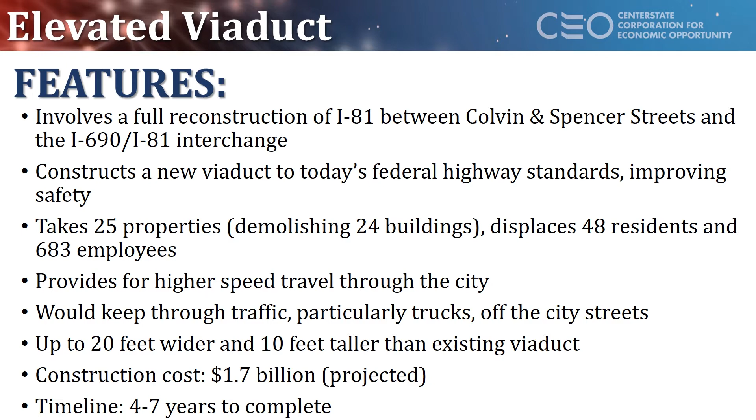It would provide for higher speed travel through the city and would keep through traffic, particularly trucks, off city streets. It would be 10 to 20 feet wider and 10 feet higher than the existing viaduct. The projected cost is $1.7 billion to construct, and it would take approximately 4 to 7 years to complete.

The new elevated viaduct's advantages are that it is a proven system for moving vehicles through downtown Syracuse, and it keeps through traffic off the city streets. The disadvantages of the new viaduct are the acquisition of properties and demolition of buildings, forcing the relocation of homes and businesses, and the value of that property being lost from the tax rolls.

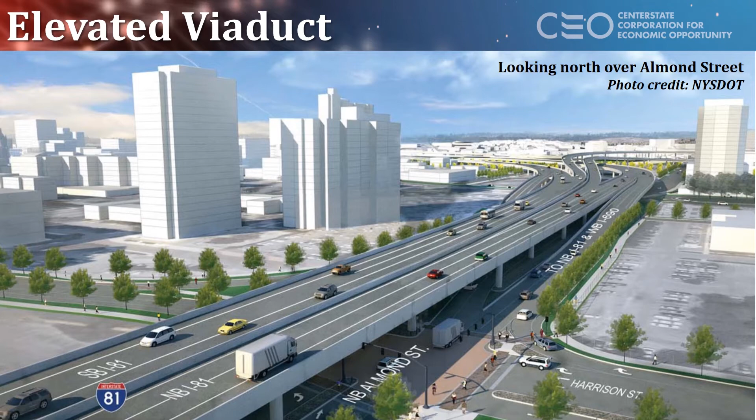Option 2: The community grid. The community grid seeks to make use of the city's numerous north-south streets that run through downtown. These streets often have traffic levels that are well below their capacity. The goal of the community grid is to disperse the traffic across the street network.

Most of the traffic that is using the current viaduct starts or ends in downtown, University Hill, the lakefront, or other neighborhoods in the city center. Under the community grid, daily commutes do not change very much from today. And the community grid has the advantage in that if there is a disruption, a driver can easily switch from one street to another to avoid it.

The community grid brings automobile traffic through downtown and more visitors into the central city, supporting downtown commerce. Land now used by the viaduct can be repurposed for other uses.

Features of the community grid: it disperses traffic along the city street grid. Almond Street becomes 2 lanes in each direction with turning bays. It includes a new interchange for I-690 at Crouse and Irving Avenues. I-481 becomes the new I-81.

It de-designates the section of I-81 between I-481 to the south and I-690, maintaining a state highway to approximately Martin Luther King Jr. Drive. It maintains the section of I-81 north of I-690 as a high-speed interstate with a new designation. It requires the acquisition and demolition of 5 buildings, displacing approximately 83 employees and no residents. It is projected to cost $1.3 billion to construct and take approximately 4 to 7 years to complete.

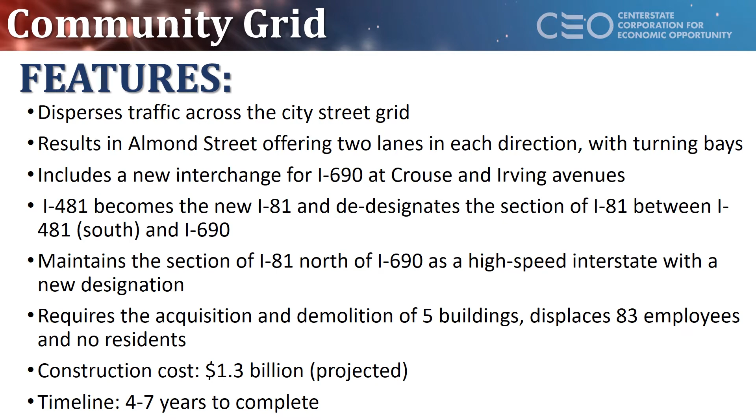A challenge of the community grid is that should some through traffic not divert to what is today 481, there may be more traffic on city streets, which would result in additional wear and tear on these roads.

Under the community grid, the current I-481 becomes the new I-81, and a third lane is added at some key points. North of the southern I-481 interchange, today's I-81 would function like it currently does, but becomes a state highway until it transitions to city street speeds around Martin Luther King Jr. Drive, where it would become Almond Street.

The section of I-81 north of downtown, from where it intersects with I-690, to the northern I-481 interchange, remains a federal highway spur with highway speeds and multiple lanes, but with a new designation.

Through traffic goes around the city on what is today I-481, and drivers who want to come into the city use the old I-81. It is important to remember that according to NYSDOT, most of the traffic using the viaduct today has destinations in downtown, University Hill, and the lakefront, so in reality, not a lot of through traffic exists on the viaduct, so there may only be a limited impact on I-481.

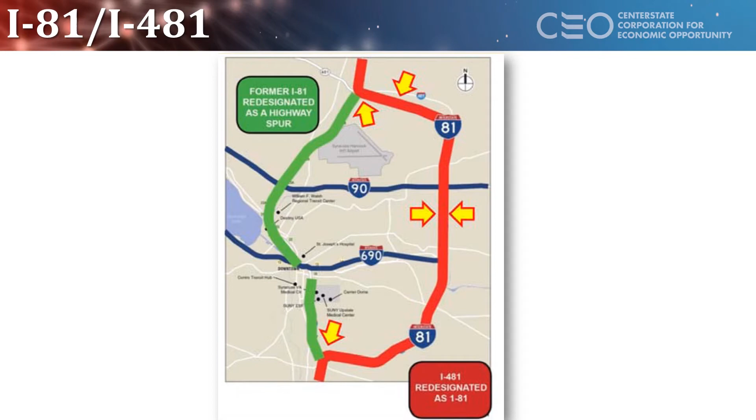A disadvantage of the community grid is that travelers going from the south to the west, or vice versa, wishing to stay on a highway, will be redirected further east. This will add some extra miles and time to their journey, a particular concern for trucks.

Option 3: a tunnel. Added back into the list of alternatives in January 2018, the tunnel does not have as much detail available about it as compared to the new viaduct and community grid. What can be shared was learned from the tunnel options NYSDOT studied earlier in the project, the tunnel feasibility study completed by WSP in 2017, as well as other recently completed and ongoing tunnel projects across the country.

In Syracuse, the tunnel option envisions a 4-lane tunnel built under the path of the current I-81 viaduct or closely adjacent to it. The tunnel would provide a place for through traffic to move quickly through the city, while those destined for the center city would use elements of the community grid built above the tunnel. The advantage of the tunnel is that it allows through traffic to travel through the city without congesting city streets.

The tunnel is the most expensive option, with construction estimates between $3.5 and $4.5 billion, and it also imposes operating and maintenance costs the other solutions do not. These costs result from the need to run lights in the tunnel 24 hours a day, to exhaust auto emissions and pump in fresh air 24 hours a day, and to continuously pump saline groundwater away from the tunnel structure, which otherwise can cause corrosion.

Features of a tunnel: it provides for higher speed travel through the city. It may or may not be an interstate. Through traffic would not have the option to exit for downtown and University Hill. It would keep through traffic, particularly trucks, off of city streets. Unknown underground conditions could increase construction time. The impacts on commute time, tax base, property acquisitions, and displacement of residents and employees are currently unknown.

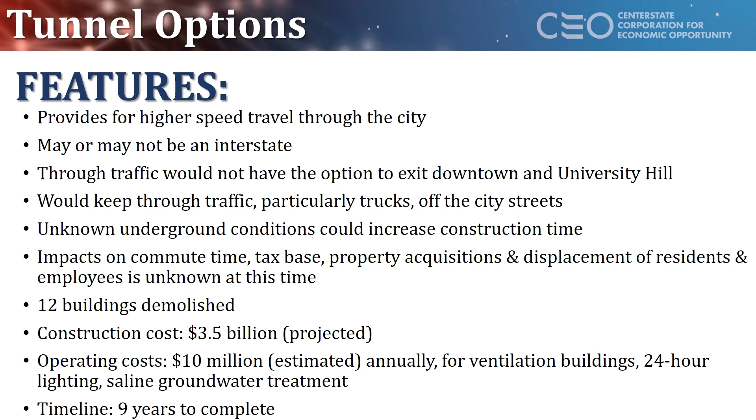12 buildings would be demolished. It's projected to cost $3.5 billion or more to construct. It would have higher annual operating and maintenance costs. Some projections show this to be as high as $10 million annually for ventilation, 24-hour lighting, and saline groundwater treatment, and it's projected to take 9 years to complete.

The tunnel would allow high-speed through traffic a path through the city, but would not serve the needs of travelers starting or ending in downtown or University Hill. In fact, when the tunnel is going between downtown and University Hill, it is 80 feet below ground as conceptualized by NYSDOT and WSP. There is no Harrison-Adams interchange, and there is no way to get to center city destinations from the tunnel. These travelers would need to use city streets.

One advantage of the tunnel and the new viaduct option is that they keep through traffic off of city streets. NYSDOT estimates that 15% of the 72,000 vehicles per day that use the existing viaduct are trucks. That's 10,800 trucks a day. However, trucks carrying hazardous materials would not be permitted to use the tunnel.

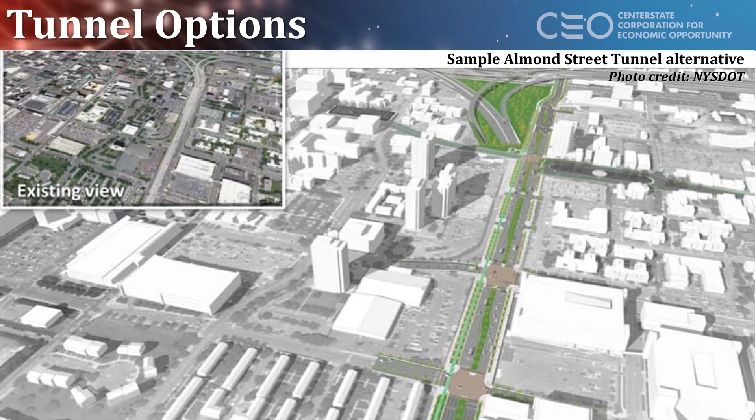The proposed orange alternative was identified in the WSP tunnel study as the most feasible. It would be 1.7 miles in length, consisting of 1 mile of twin bore sections, 1 northbound tunnel and 1 southbound tunnel, and 0.7 miles of cut and cover. There would be 22 properties taken, 12 with buildings that would be demolished, including 1 historic structure.

The tunnel would be designed to handle a little over 30,000 cars a day, less than half the traffic that uses the viaduct now. It also only has a 4-foot wide breakdown lane, which means one of the key safety features sought by the Federal Highway Administration, wider breakdown lanes to get vehicles out of the flow of traffic when necessary, could not be accommodated.

The study notes that building the connections between 81 and 690 at the northern portal while maintaining traffic flow would be a particularly complicated construction endeavor. Multiple east-west streets have to be closed to accommodate a tunnel, and there are infrastructure challenges, such as boring under the SU steam lines that feed the institutions on the hill.

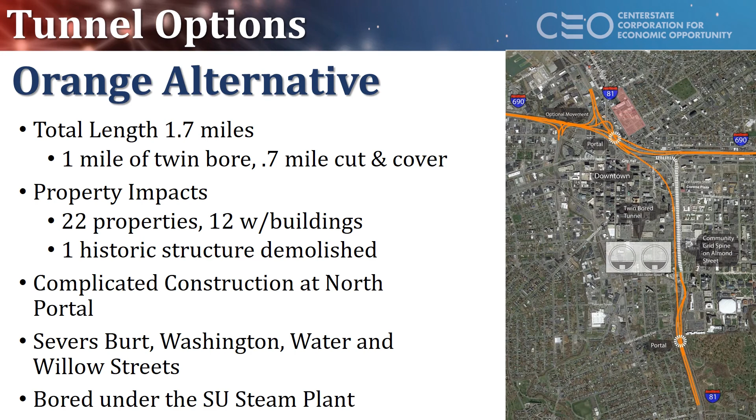Currently, there are 3 options remaining on the table: the new elevated viaduct, the community grid, and the tunnel, and no recommendation has been made by NYSDOT as to which alternative is best. NYSDOT is now doing detailed tunnel engineering and completing the draft environmental impact statement, or DEIS. The engineering and DEIS work is expected to take 12 to 18 more months to complete.

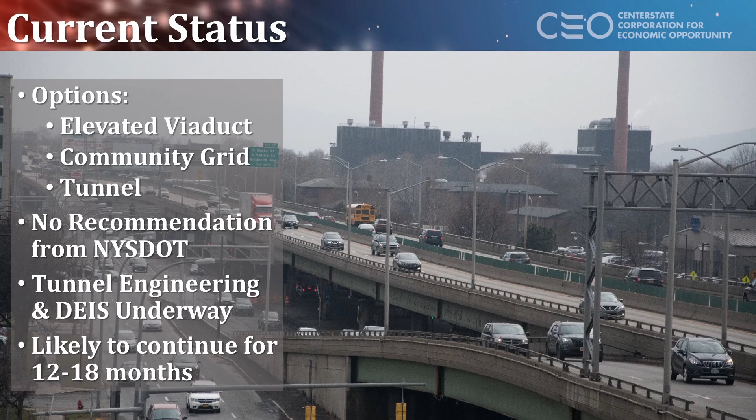The I-81 Viaduct project is one of the most significant infrastructure projects our community faces. The chosen option will bring $1 billion or more of investment into the city of Syracuse and central New York, produce countless short and long-term jobs, and shape our physical and economic landscapes for generations to come.